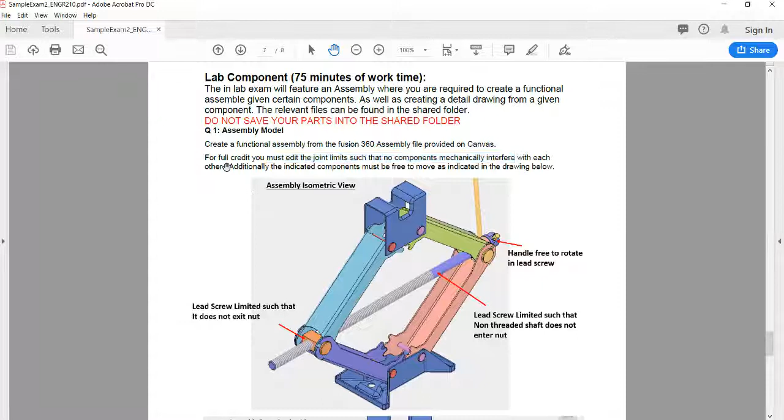For this test, you will not be allowed to use contact sets, so you'll have to do it using joint limits. Okay, and also you need to capture the motion as indicated in the diagram below.

So I'll probably give you multiple views. Here's an isometric view, and it's showing you that this lead screw, as this thing screws out, it shouldn't exit this nut because it would fall apart. Now, yes, it would be free to, but we want to limit that motion.

And also, if you're screwing this screw forward, this threaded part right here, it shouldn't be able to go through this non-threaded part of the lead screw rod. So that's something that we need to limit with a joint. This needs to be free to rotate, this little arm right here.

And then what you're seeing here is a section view, and you're seeing that the lead screw is free to rotate and translate through the nut, and it translates — I have to check the units on this — I guess this is 100 thousandths of an inch per degree, per 360 degree revolution.

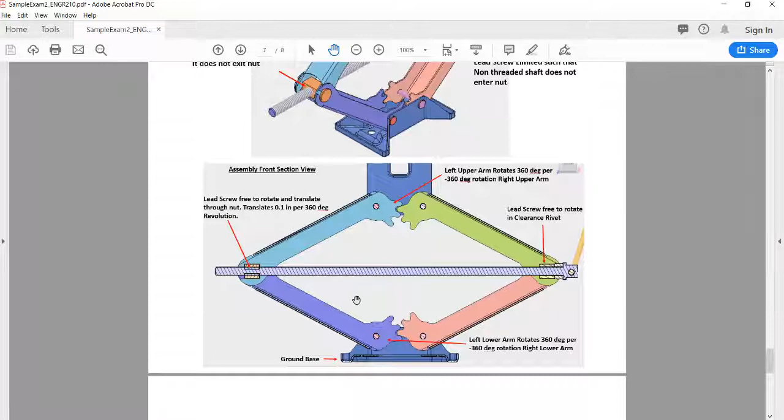It's also saying that up top and down low, these swing arms right here will rotate with each other, but for every 360 degrees this arm rotates, this one must rotate negative 360 degrees. And we want to make sure that these little geared teeth are not going to interfere with each other.

And then finally, make sure you know which component should be grounded. In this case, that is the base. Let's go ahead and take a look at the model and see if we can put this thing together.

So step one for us is going to make sure that this base component here is grounded. You can see this little pin that it is grounded. But just in case it wasn't, if you were to right click on the component, there's the ground option, and what that does is that I can't move it around.

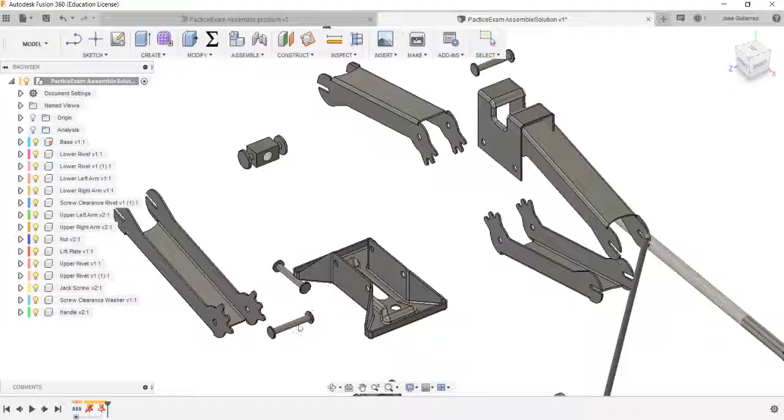If I click it, I can't move it around. All the other pieces right now, if you click them, you can move them around. One thing that may make it easier is if you go into inspect, or just press Shift N, you can make these color coded, and that makes it a little bit easier.

So in brainstorming this, one thing might be that these pins could be free to rotate here, but you don't really need to add any extra degrees of freedom if they're not needed. So it doesn't really help or hurt if this pin were to spin in this hole. So I'm just going to make it rigid to keep this more simple.

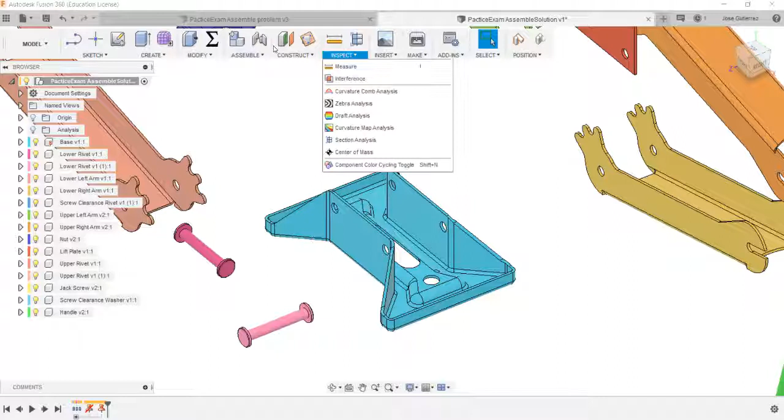So if you go to Assembly and click on the Joint tool, or just press J. From now on, I'll be pressing J, and I'll continue.

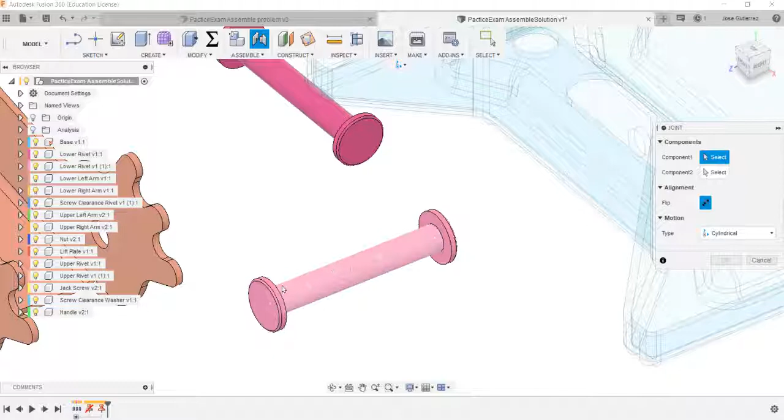What you want to be able to do is — a lot of times there's a ton of joint options — I want to be on this axle of this pin, and if you hold down the control button, that won't let me select. See here, I can't select any of the joints, whereas if I don't hold it down, it's kind of difficult. So hold control, and then let's go ahead and put that on this face.

I'm holding control again, and then I get a coincident. Now I have a cylindrical joint type. I'm going to go ahead and change that to rigid for now. And then I'm going to use the joint tool again, J.

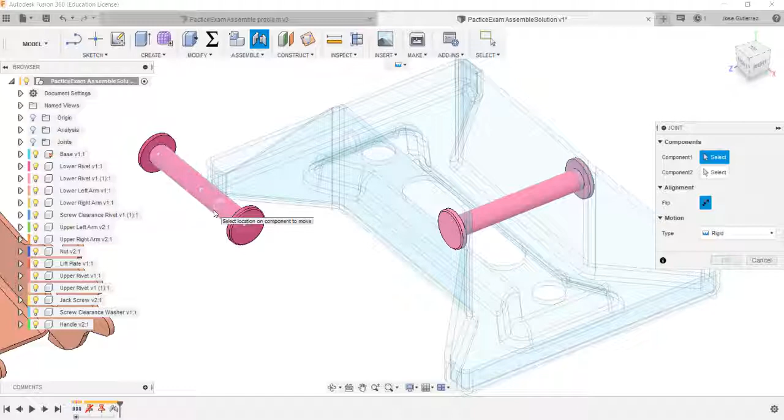And so I got something that looks like that. What do you need to do? If the joint, now you see this face is meeting nice and flush like I had indicated, it's just in the wrong direction. All you need to do is flip it.

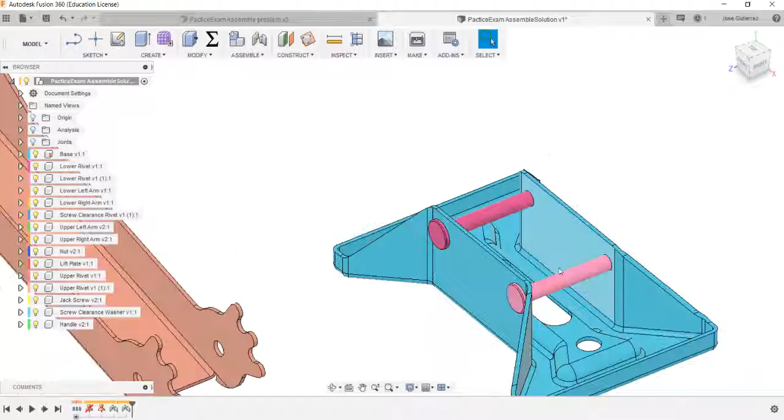Okay, let's go ahead and add the pins up top. So I'm going to go J, holding that control button. Make sure you're getting in the center of this hole.

So now let's add joints so that the lower arms are in place. So I'll press J, click J, and then Control, select that center point of that eye.

That's going to go on this shaft, but I don't want to join it to the shaft because I don't have a real good spot to pick it up. So I might just put it next to this face, flush on that face. Maybe you're thinking, hey, that's a good spot to put it in.

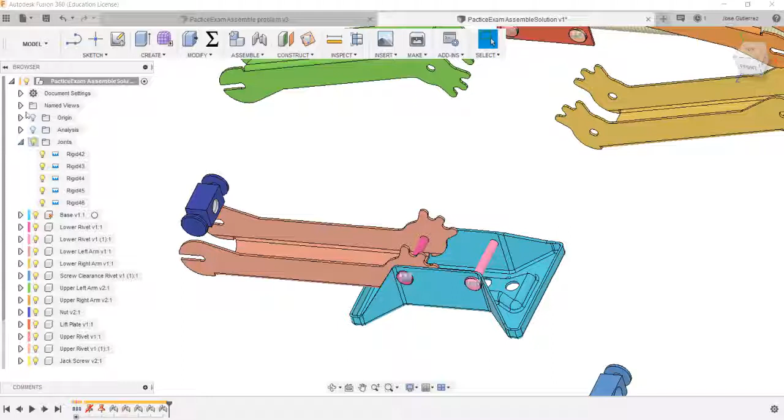But now I click OK, and I realize I can't move this joint. Why not? Well, because it's rigid, and you may even want to turn on your joints. If you click the light bulb next to the joints, you can turn it on.

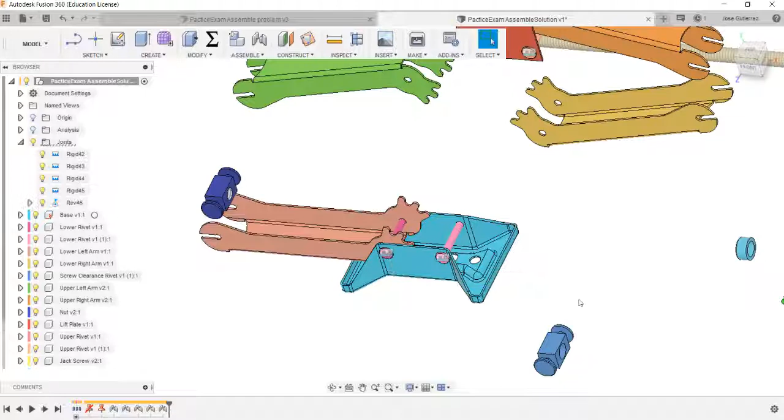And so that last joint, I need to edit it. Right click and edit it, change its type to be, let's just do a revolute joint. For the most part, it's nice to limit the degrees of freedom, and we really just want to capture that this joint can spin. And so I'm going to go J,

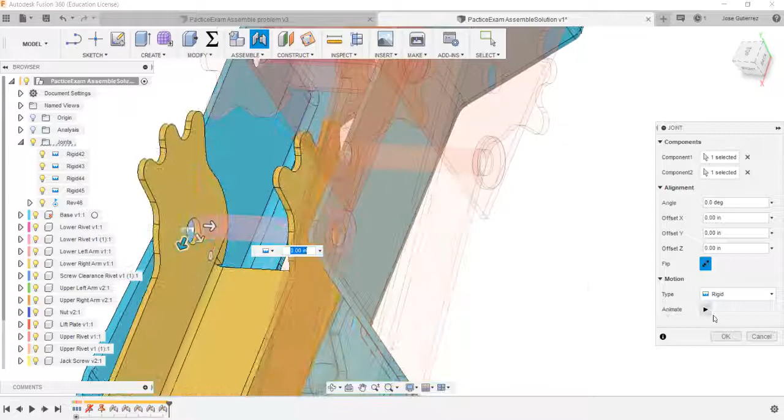Get this joint, do the same thing. Make sure you change that to revolute.

Okay, now let's make the joints on the top, so the upper arms. So I'm going to go J, there we go. Starting to look good.

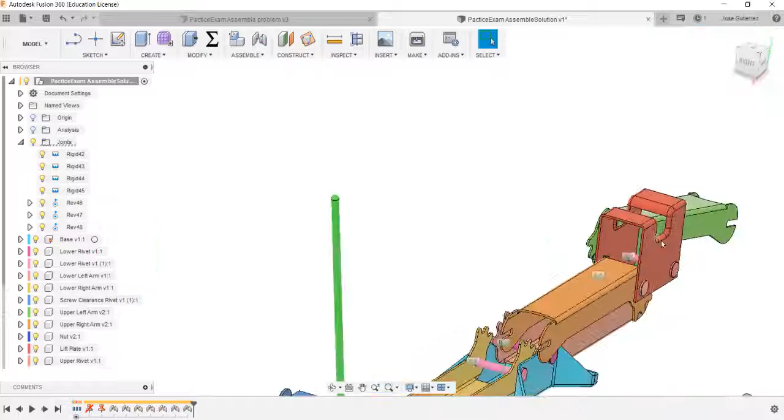I see this guy right here. I'm going to add it to that face right here. Okay, it's starting to come together.

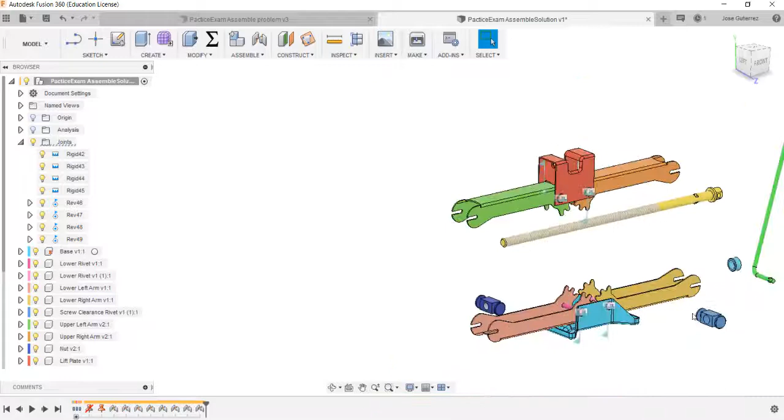Now, what we'll see is there's a threaded nut, and then there's one that's smooth that just lets things spin in it. So let's take a look back at the exam. Okay, so it looks like the threaded nut is on the left side.

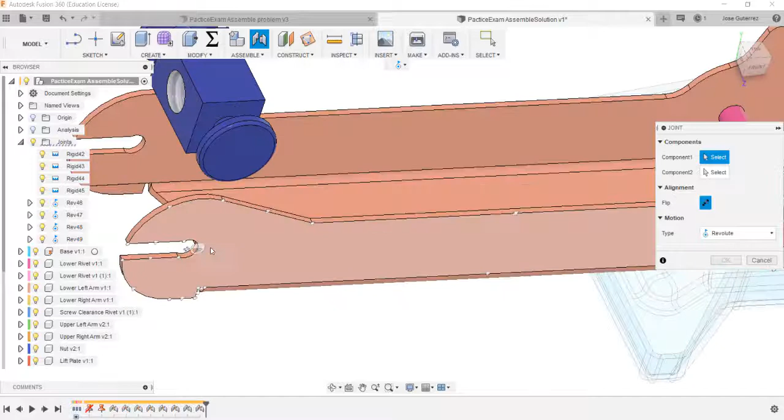Okay, so going back, let's add this joint on this face here. Pressing Control will let us pick up that spot. Let's add it right here.

I'm going to go ahead and add this guy's joint right here. So click J, Control on that face. I'm going to add it right here.

Okay, and I'm going to move stuff around because it's going to be easier to see. So you can capture position and then press J. And then I'm going to try to add it to this face right in the middle.

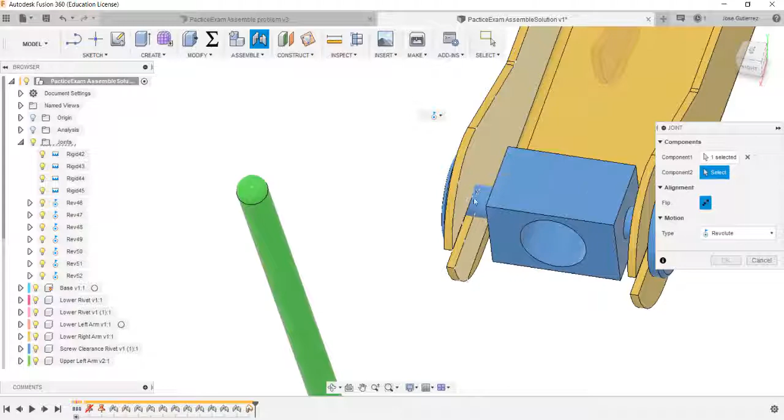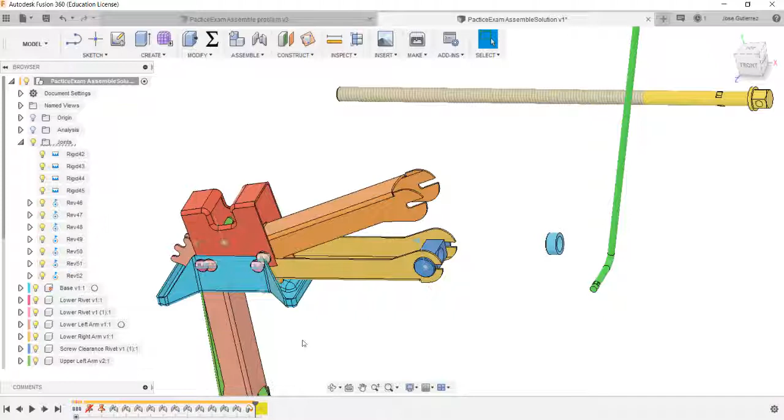Okay, and I get a warning. Uh-oh, it's not going to let me do it. What is going on? This might happen to you in the middle of your exam, and you're sitting there, and oh no, all the joints just went red. What happened? Let me roll the history back so not everything is red. That's kind of scary. But what is going on here?

Okay, and what's going on here is you're going along thinking, oh, we're doing everything right. Let me actually show you a view from the left. And what you'll see is that when I added all those revolute joints to these faces here, there's a little bit of gap.

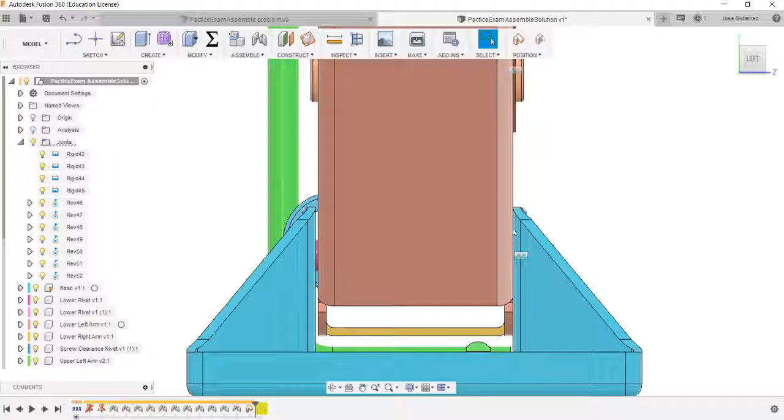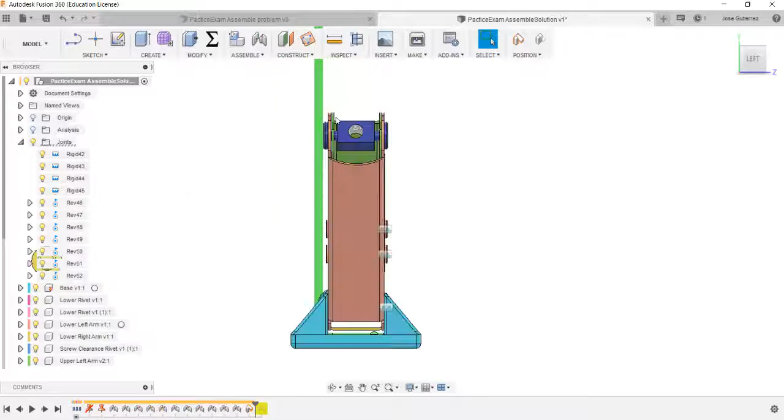That's because there should be some clearance here. And so since I was picking up on this left face, or right face here, the left face of the right side, what I did was create a gap over here. And that is, it's kind of okay, but there's a problem.

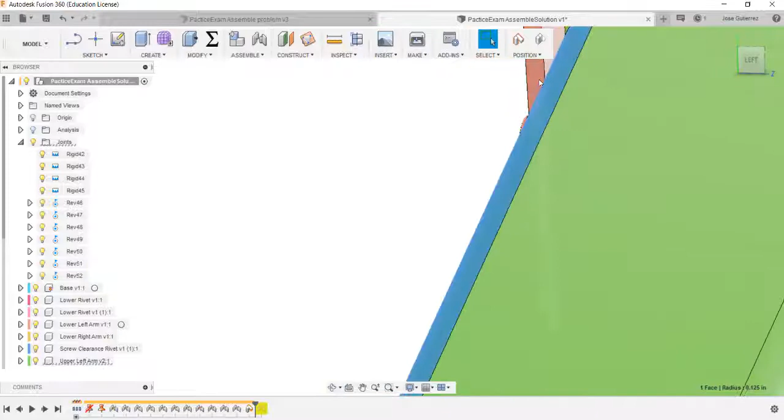Let me show you what this problem is. As I was going through and adding these joints, what I did was I joined this onto the right side face of this left edge of the top bracket. Why is that a problem?

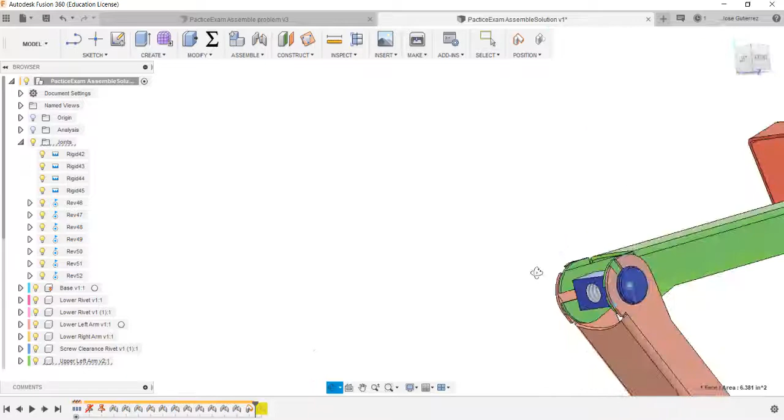Well, now what you can see is if everything is riding on the high side here, but this thing over here is not allowing it, what I've basically done is that there is no possible way this thing - and if you kind of come down, let's take a look at the top, like where it's just sitting right now. It's actually got a conflict.

So it can't, because it's been pushed to the side, it can't join where we wanted it to do. So the quick and dirty way to do this is to change it up, because we don't want them all to be cylindrical joints. If we made these all cylindrical joints, we wouldn't have any control over where these pieces are going.

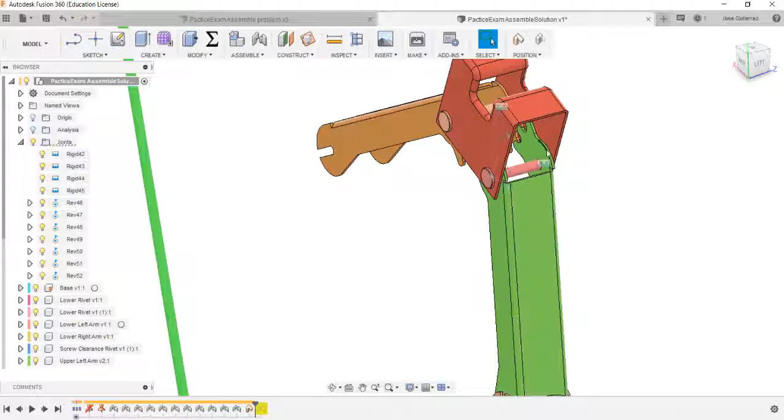But we could add a degree of freedom to just one of these joints, and that will let it accommodate this translation. So if I go back to this joint, which is our problem child, this Rev 49, and you edit that joint, and if you go ahead and make that one a cylindrical joint, okay, let's see what happens when we try to roll back our history.

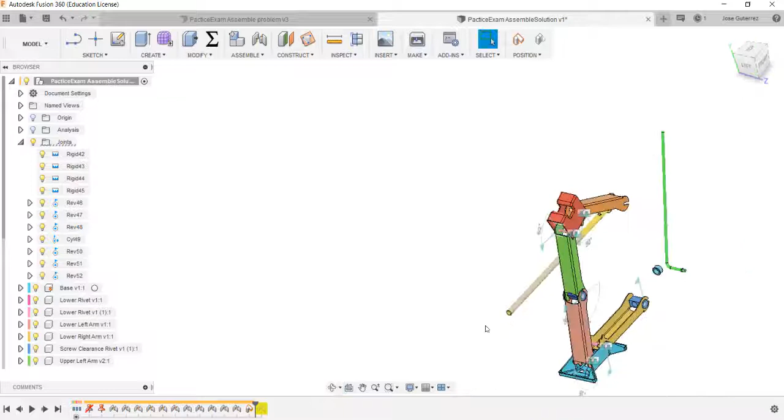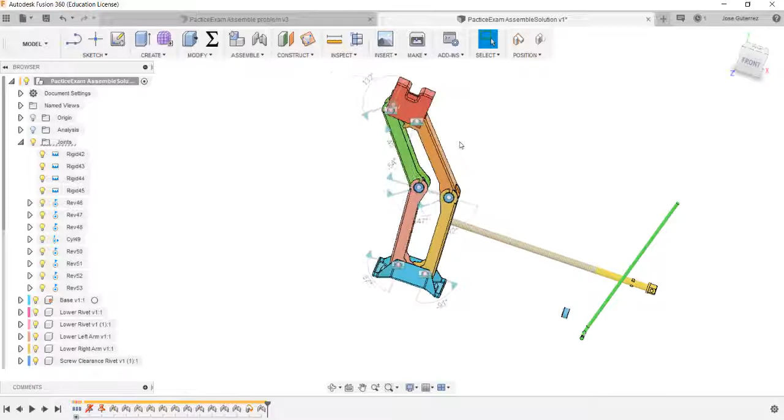It now lets it join. Okay, so that's good. Just adding that one degree of freedom is going to let us get this joint that we wanted. There's a better way, and I'll go over that at the end of this video, but if you're on the exam and just want to get it done, adding that one degree of freedom so we didn't have the joint conflict is the quickest way.

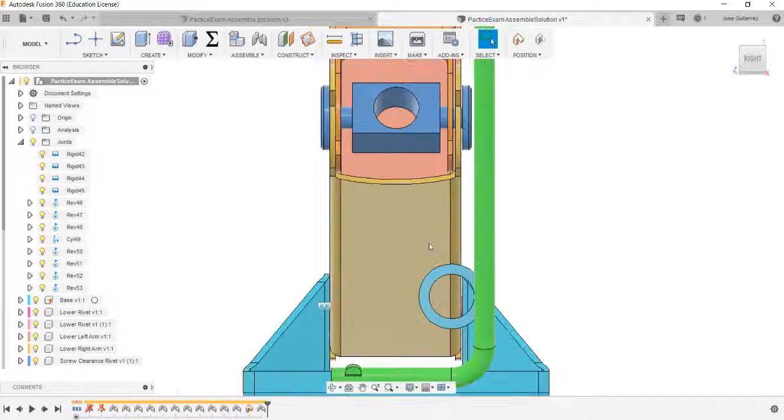The better way might be to make sure that all of these joints have center to center alignment, because I've got this funky gap here. In order to do that, you're going to have to build in joint origins, and make center point joint origins. Okay, so let's continue along.

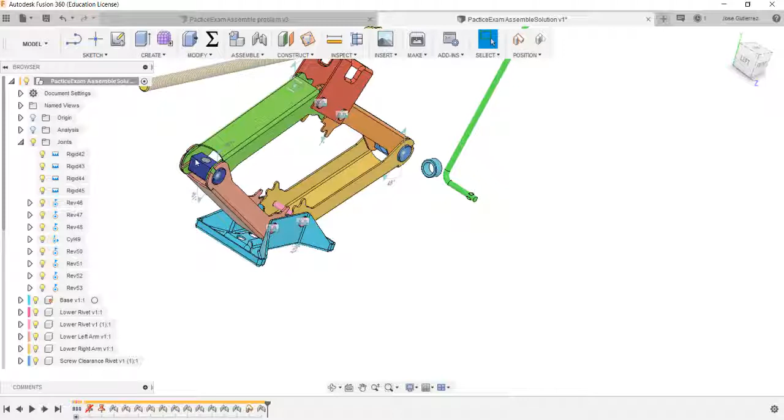And what we might want to do is make a cylindrical joint because it's got to slide and translate through this threaded part. So let's go joint, I'll capture position, and I'm going to go right here to right there, and let's make that a cylindrical joint.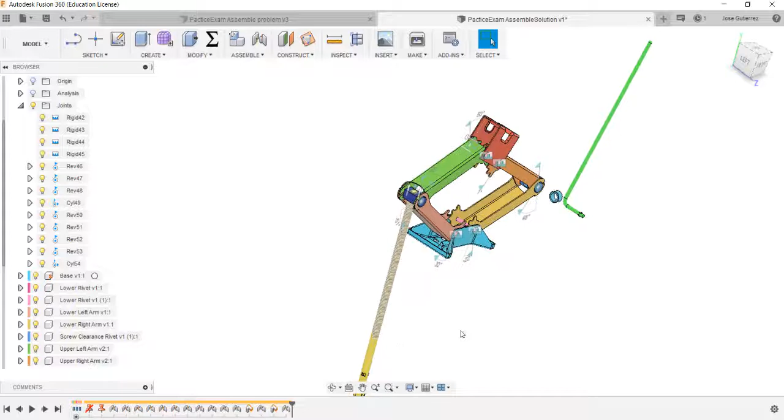And then let's make another joint. Actually, before I do that, let's join this little bushing. Where does it go? Let's take a look. It looks like that bushing is right here. Okay, and we can see it in the other picture. It's right there. So let's go join here.

And I could give this some degrees of freedom, but it's honestly not necessary. So I'm just going to go ahead and make this a rigid joint and flip the direction.

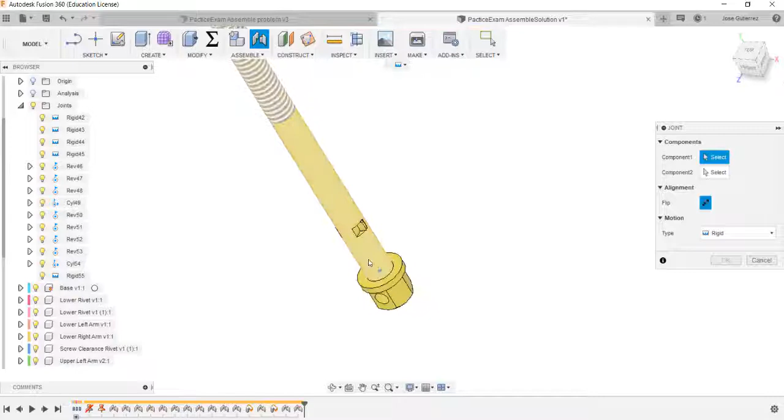Okay, and then I'll make one more joint here. I'm going to just let this, since it's not supposed to translate, like the bushing wouldn't let it translate through here. And then there's these little wings right here that's not going to let it move through this holder. So let's just make this a cylindrical or a rotational joint. So let's go ahead and make it a revolute joint. Flip the direction and okay.

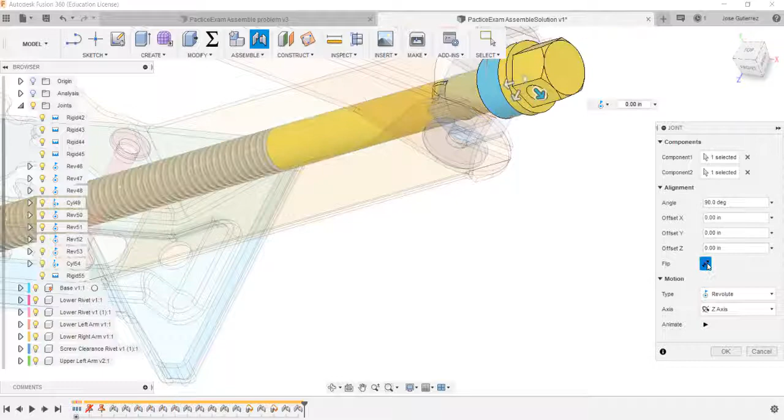And by adding that one degree of freedom of the revolute joint, it's letting it accommodate it. If you hadn't done that, it would actually have a conflict right now. But now we don't have that conflict.

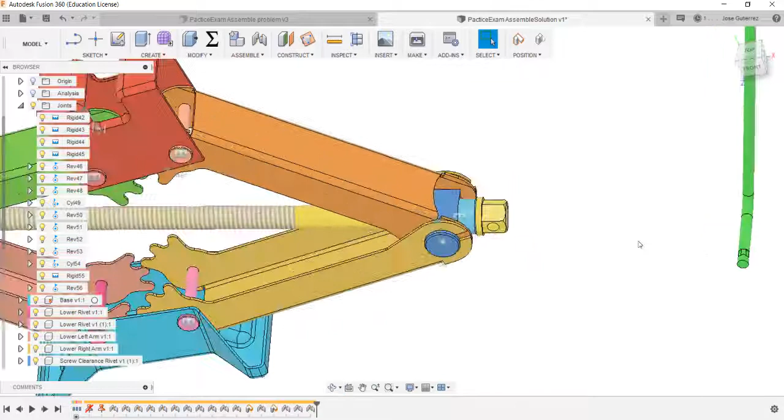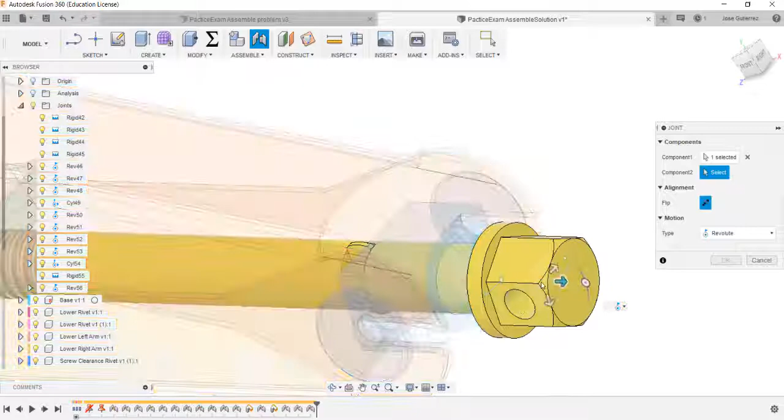And then I'm going to go ahead and let's join in this guy right here. So joint, continue this, and it's supposed to be, let's take a look. It's supposed to be free to rotate in here. So we want this little crank arm free to rotate. So press Control, and then I can easily click that joint origin in the middle, and let's just let it be a revolute joint.

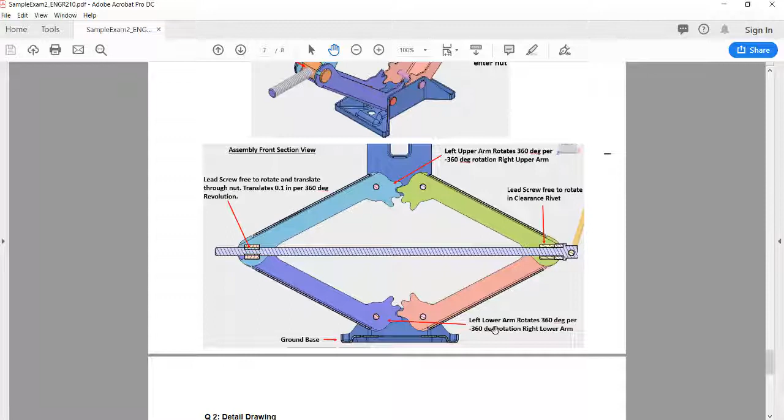Okay, so I'm not done yet though, because I come back to my problem statement, and now I need to edit the joint limits and make joint relationships so that it captures all these. So I need this joint relation, this joint relationship, and this one. I'm going to go ahead and add these rotational joint relationships.

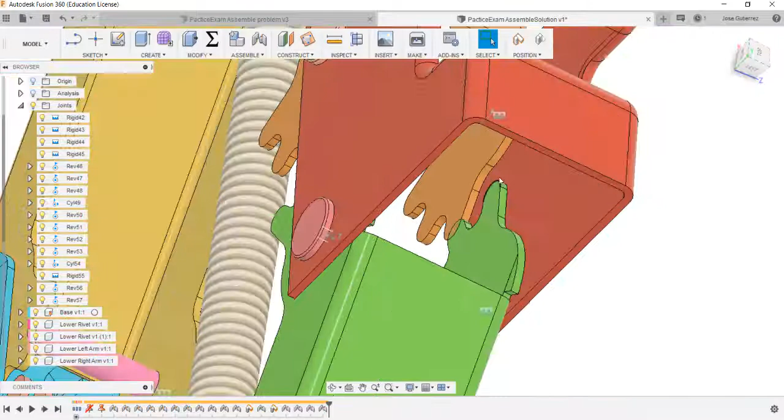One thing will be is that right now, I can't just put it in place. So if you just go ahead and add the joint relationship in place, you may get collisions, so like you might have these gear teeth interacting with each other. That's not good. One thing that we should know is that at the limits, so either 0 or 90 degrees, these arms would have to come together.

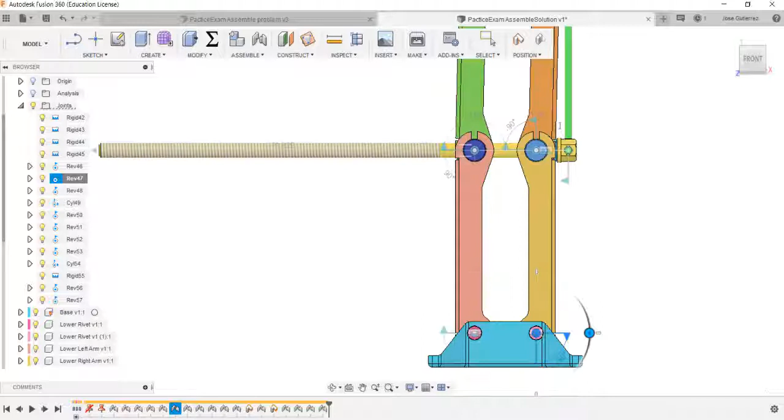So what you can do is take your joint, drive the joint and put it at a limit. So I'm going to go 90 degrees here and say, okay, I'm going to take this guy, drive this joint and say 90 degrees. Oh, and I better do negative 90. Okay, go ahead and capture the position.

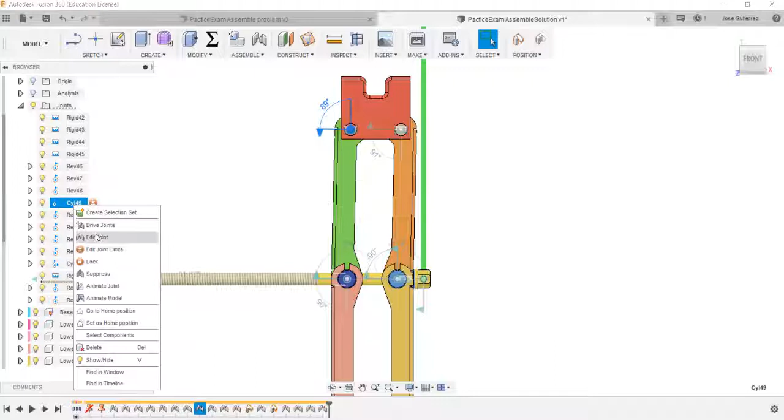And actually, you know what, on top, let's go with these joints up here. I'm going to go ahead and drive that joint to be 90. So this cylindrical, say drive joint, make the angle 90. And this one is 90 too. So now I'm going to capture, oh, Control Z. Let's go ahead and capture that position.

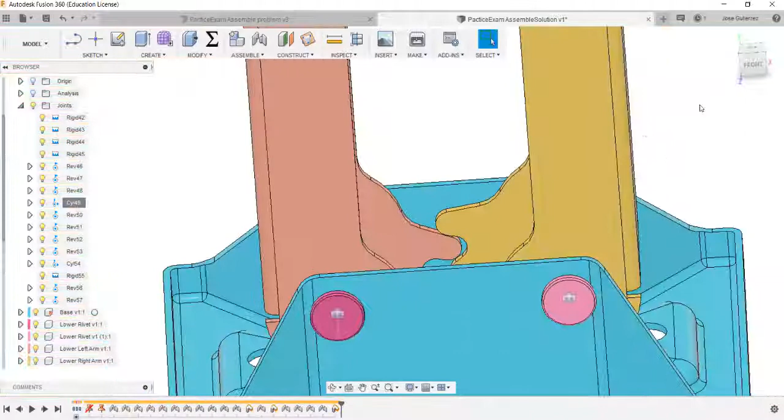So why is this important? Well, if you come in and look, what I've got is there's no contact right now. And it might even be a good idea, and I always like doing this, is to make a section view. So if you make a section view, let's go ahead and show the origin. And I'm actually going to have to move it halfway through this face.

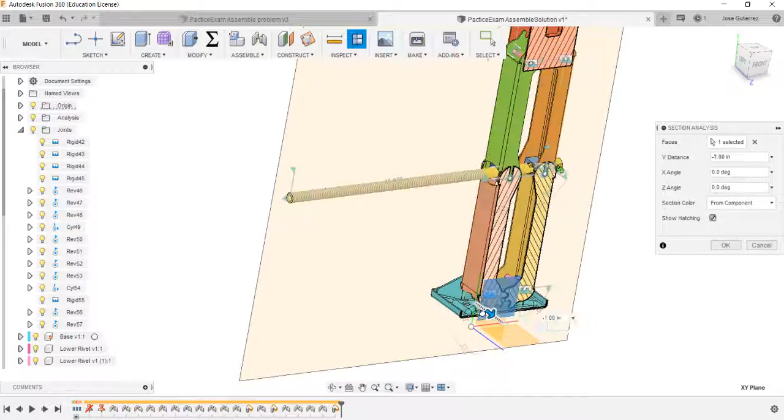Why section views are nice is that now it's letting me see what's going on in the middle. So when it is at 90 degrees, I don't have any interference, and these gear teeth here are now going to interact properly.

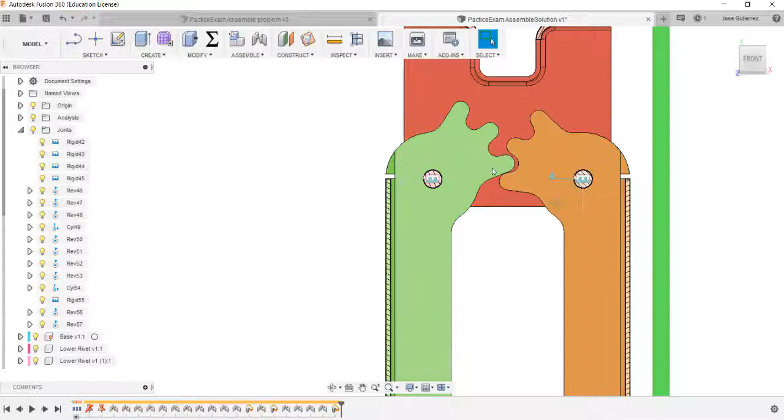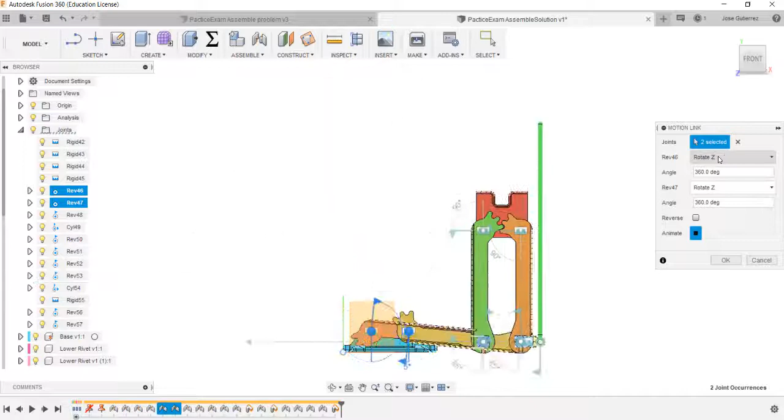So now that it's in the correct position, we can go and set our joint relationships. I'm going to go underneath Assemble, go to Motion Link, select the joints - this guy and this guy. And what we need is for every rotation, one rotates, the other should rotate the opposite direction. So you can type in negative 360 or you can reverse the direction. So that's looking correct.

So now we've got that and you can play with it. So now it's actually a good idea in the section view to take a look at it, and you'll see I don't have any mechanical interference. So that's really good.

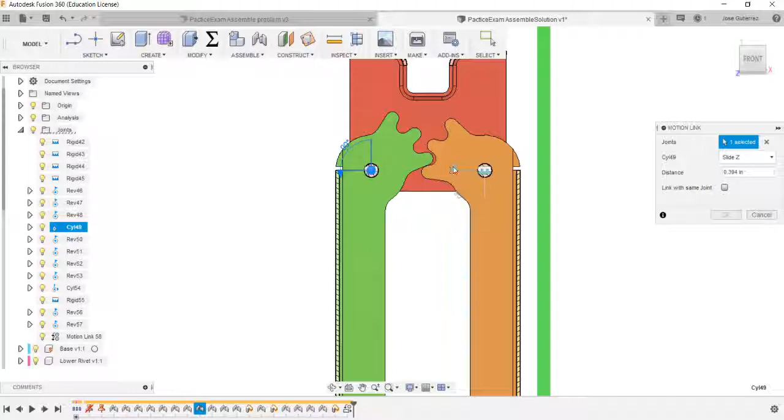I'm going to revert position because I want to be in the right spot for the upper joints, and go ahead and click Assemble and take a motion link between this joint and this joint. And since one of them was cylindrical, what we need to make sure it's not a slide, it's both rotate. So rotate to rotate.

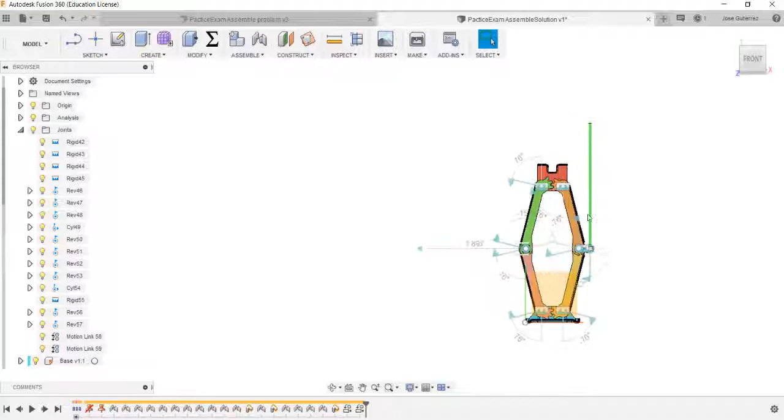And that's actually looking - actually let me reverse this. Nope, it is correct as is. So now what you can see is this thing is standing up and going down.

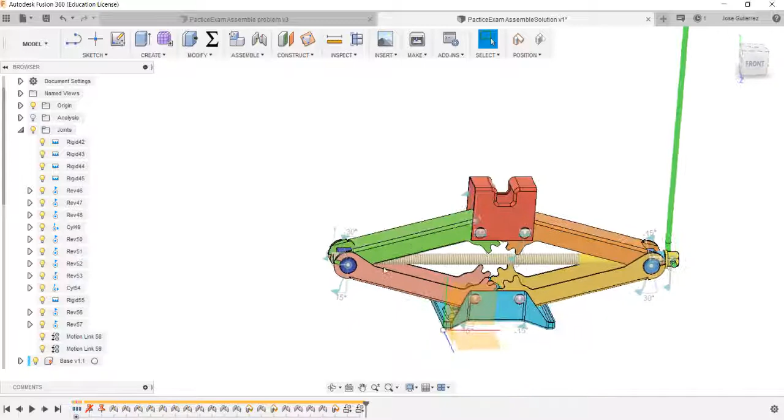Now what we need to do then is limit the joint motion so it can't go through the base plate. That's a mechanical interference that we should be able to limit. But before we even do that, I'm going to turn off my analysis, and let's go ahead and add the lead screw mechanical joint relationship.

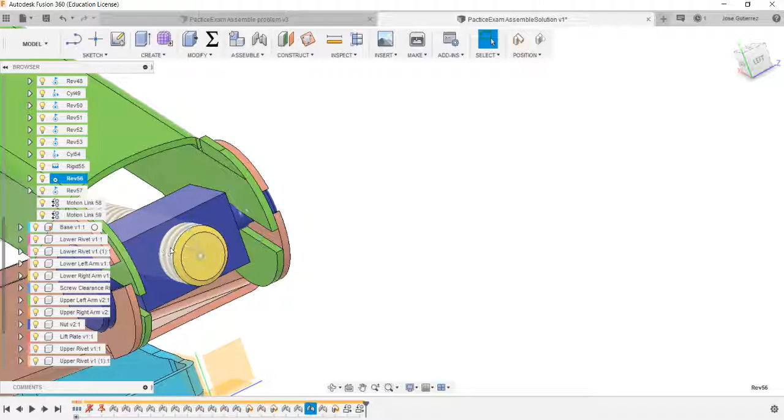So a good choice might be the revolute joint over here, because every time this spins, since the nut over here is threaded, we want the thread to be moving. What that will do is move our jack stand up and down. That's what this is - it's a jack stand you might find in the back of your car to repair your flat tire. Okay, so let's go ahead and do that.

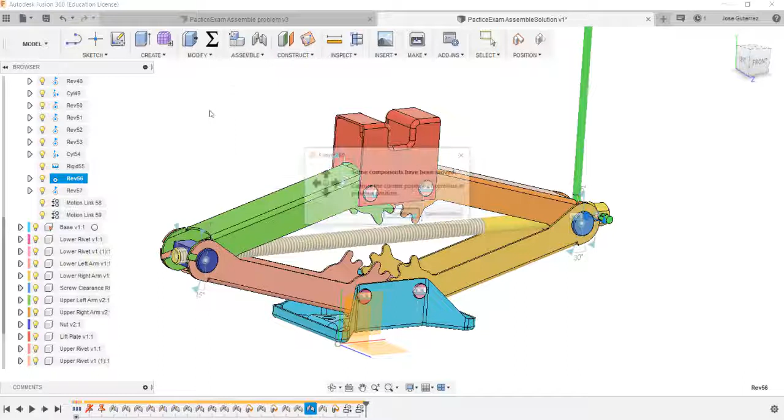So let's go to assembly, let's make a motion link, and I'll just continue. So it's going to be up here. And the joint I want to pick out, I'm looking at it right now - actually, I've already selected it. And then it's the cylindrical joint over here, so I'm going to click right there because that's that cylindrical joint.

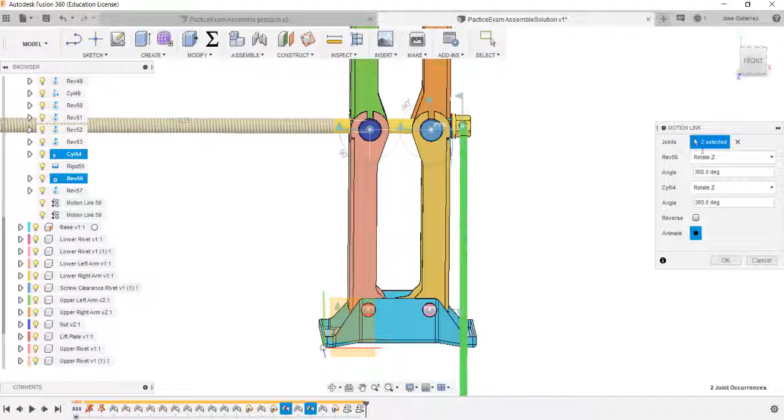So what we need to change this time is now for every revolution of our revolute joint, we need to not rotate, we need to slide. And we were given that it was 100 thousandths of an inch.

Okay, let's go ahead, and it won't animate correctly, but let's just take a look at that. One thing we can do is take this joint, the revolute joint, and drive it. So if I screw right-handedly, it should bring it together. So that's actually looking correct.

Now what's not correct is it's screwing on a non-threaded part, but you'll see here - to lower it, I'll screw the righty-tighty, lefty-loosey. So this is looking good.

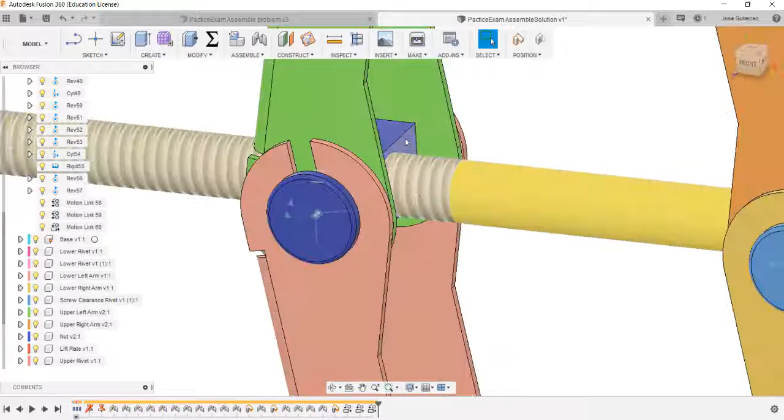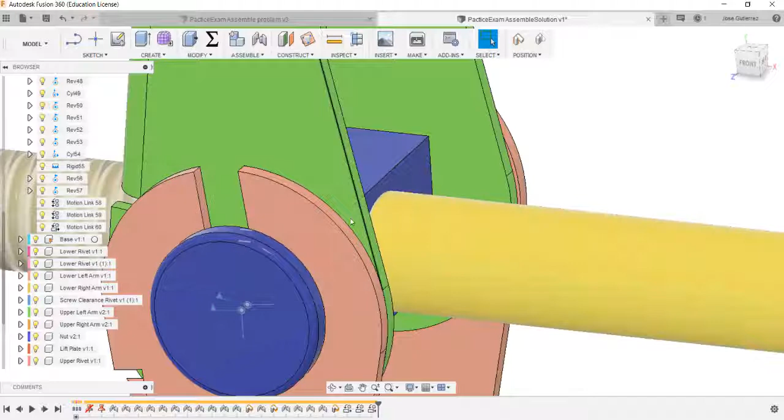And now what I'm going to do is, since I've captured that motion, I'm going to actually move this piece right here freely, and you can just eyeball this - you don't have to actually press the move. So it's like, okay, right about there my threads end. And what would happen is the threads on here would bite into this, so it wouldn't allow it, it would get stuck. So right here is the limit, and let's just make sure there's no other mechanical joint interferences - doesn't look like it.

I'm going to turn off my origin. Okay, so what you can go do is if you say drive joint limits, you'll quickly see that distance right there is 10.366 inches. So that's one of my joint limits I need to set up.

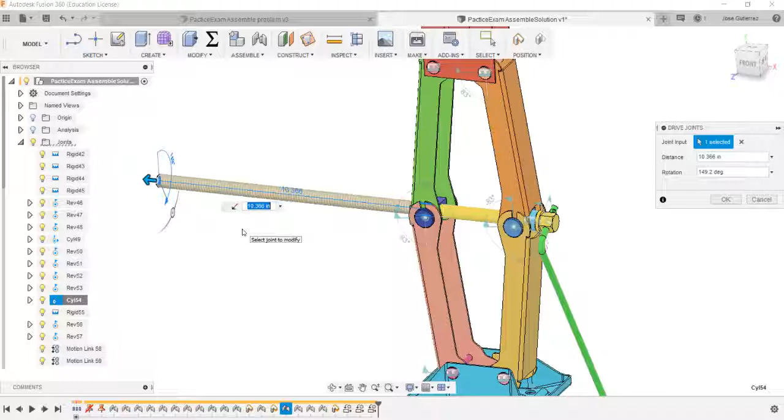But I need to go the other way, so what I want to do is let's bring this thing down.

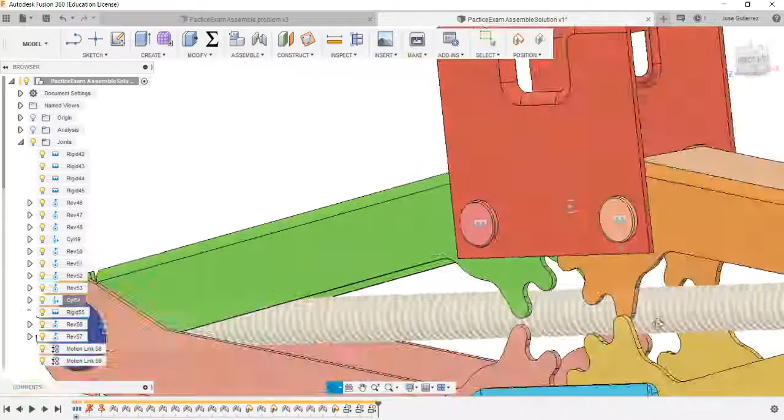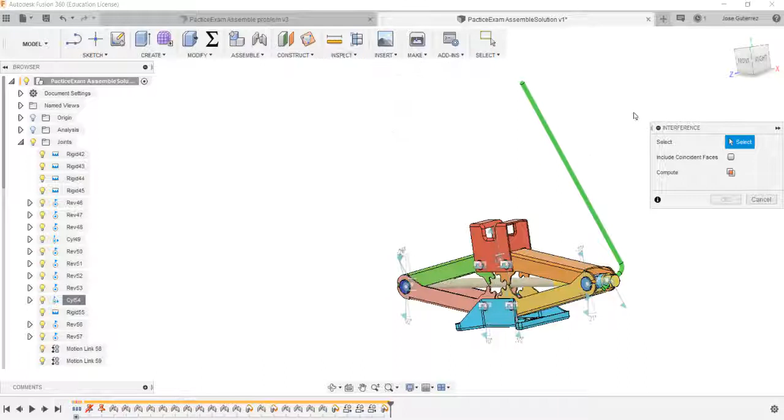I want to make sure that I'm not going to have any other mechanical interferences. Actually right here, I'm getting a little bit of collision. Now, what you can do on your exam is go to inspect, and then say compute.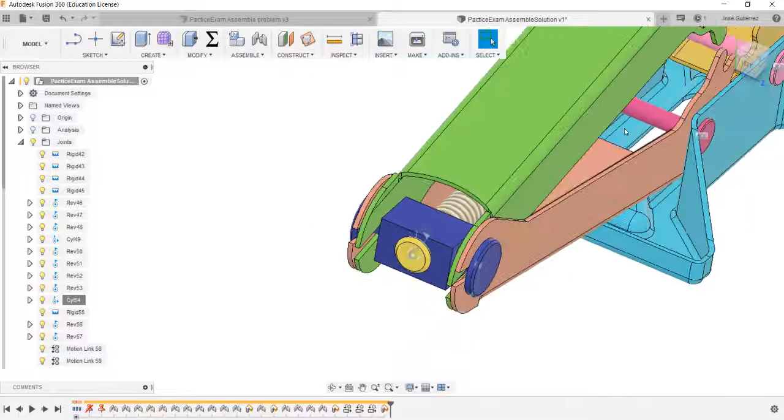So under inspection, you do interferences, select everything, and go compute. I do have an interference, but this one is actually okay. It's right here, and that's because of the way these threads were modeled, there is always going to be an interference right here.

But that one's okay. What we didn't want to see is an interference between these components. So right here, I'm actually going to limit this a little bit. I'm going to move it up.

It's not like I'm looking for an exact number here. I'm just seeing that you do a pretty good job of capturing the functionality. So about right there would be the limit. If it comes down any more, since these are free to move back and forth, that should limit this.

So let's go back to that cylindrical joint, drive it, and it's 31 thousandths of an inch, so 0.031 inches. Okay, and so now I have my joint limits.

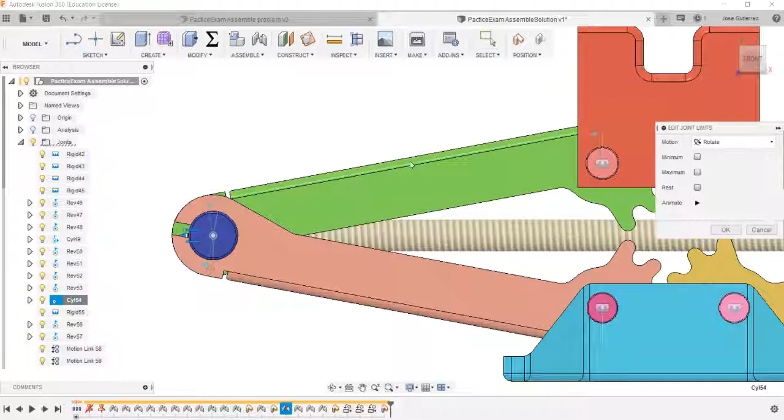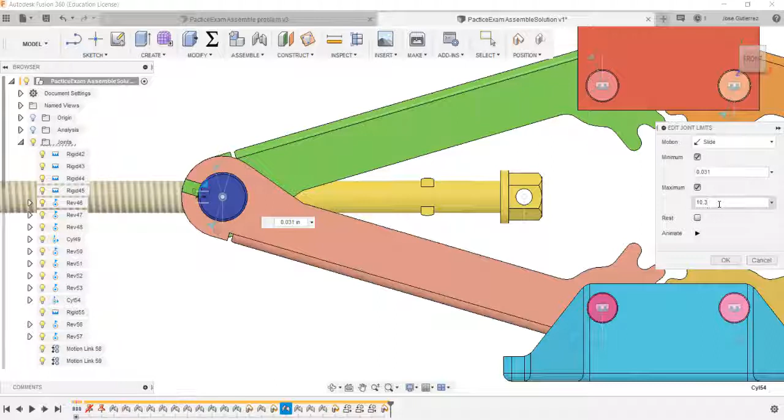So you can go to that cylindrical joint and say edit joint limits, and let's give it a minimum. We're editing the sliding, so the minimum value for sliding is 0.031, we just said, and then the maximum was 10.3, and you know what, instead of that 366, let's just do 37.

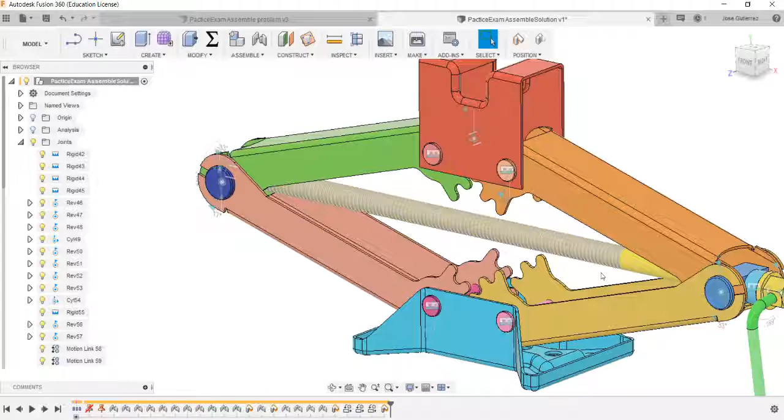So what you'll see now is that I'm not allowed to move it any further than that. And let's go ahead. One thing you might find is that even when all these components are grounded and in place, it may be hard. Like I'm trying to move this thing around, and you're like, oh no, is my motion correct?

What you can do if you want to check is drive this joint right here, and it should move. So you could drive this joint, and let's see if it's capturing it, and it is. So by turning this righty-tighty, I'm lifting my jack stand,

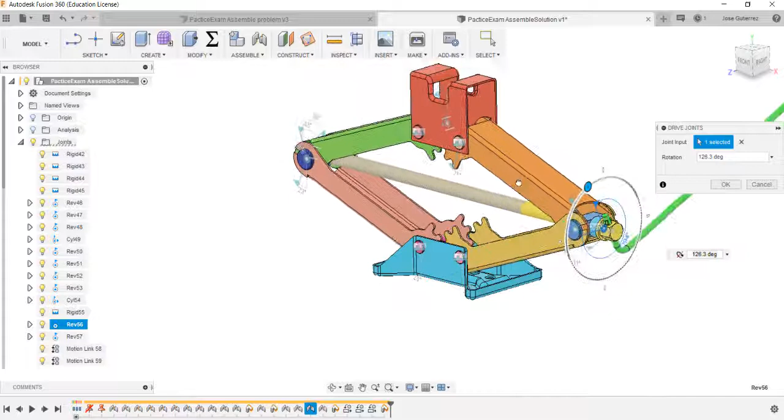and by turning it counterclockwise, I'm able to bring it down. And what you'll see is that it won't actually let me turn it anymore. So my joint limit has kicked in right here and it won't let me turn it anymore. And let's drive it the other way.

It's going to take a while. It might be quicker to try to just pull it up. No, it's...

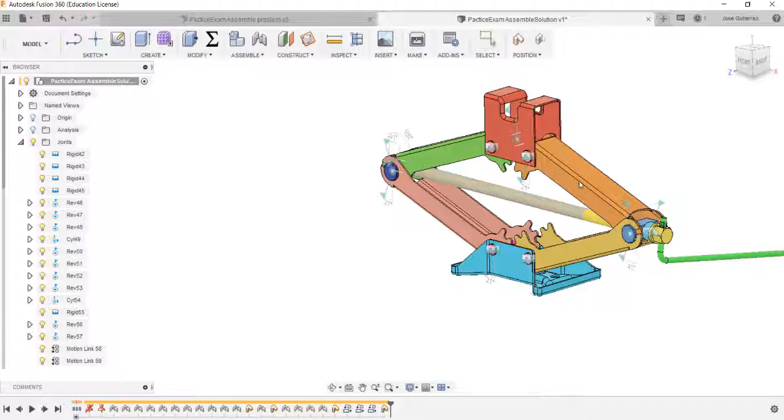So the other thing you can do with this cylindrical joint, you can drive this joint. We could move it this way, and what you'll see, this thing was spinning really fast, but now it's not going to let me drive it any further.

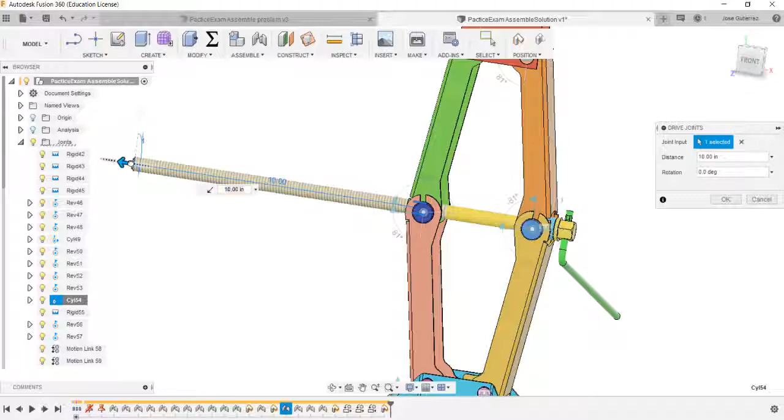Okay, so that's looking pretty good. Let's see here. Okay, so we've done it. So now we've fully captured the functionality, and this would be a 100%.

So I will go over now the alternate way of how you could put this together without making one of these joints a cylindrical joint.

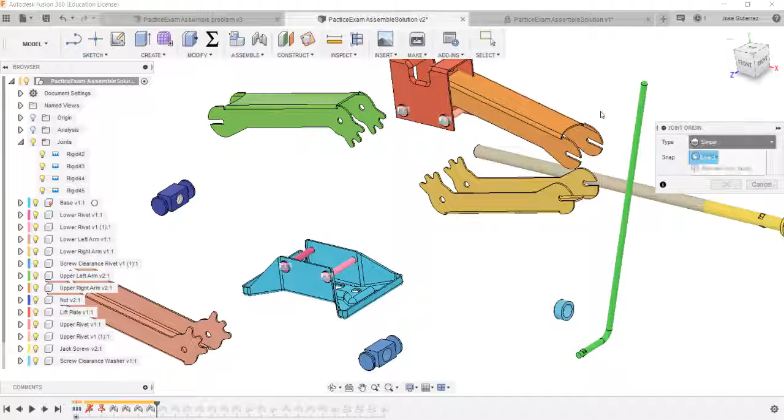Another way you could make sure that you were able to get these things to join together without having any conflict would be to make artificial joint origins. So if you were to make a joint origin as a center to center between two faces, you could go into a joint origin into these components that don't have joint origins and make center origins.

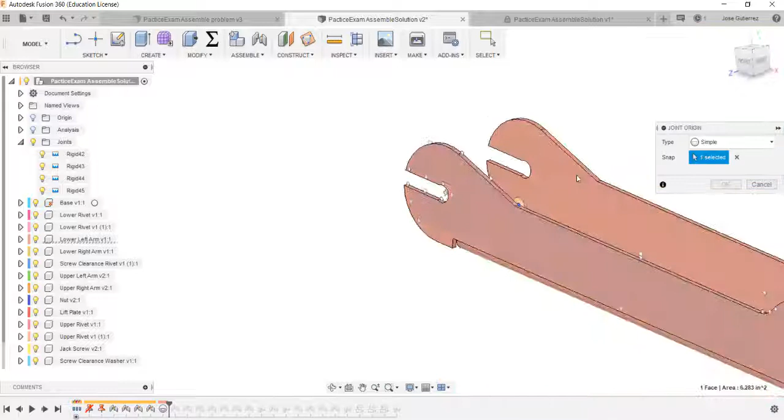So if you press Control, now I'm making a joint origin there, and I might make a joint origin here. So if you right click, repeat joint origin, between two faces.

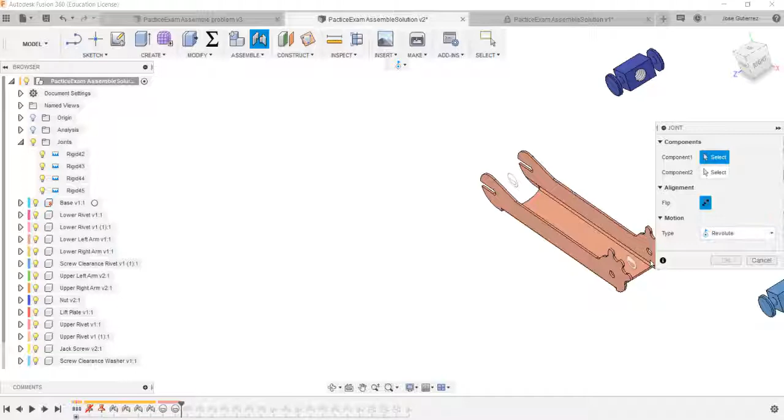And let's select our origin to be right on this center point. What we could do is when we go to joint, we could do our revolute, do that center point origin, and then snap to the center point in between the base. And then what we've done, if you look from the side, is now we've enforced that it's right smack dab in the center.

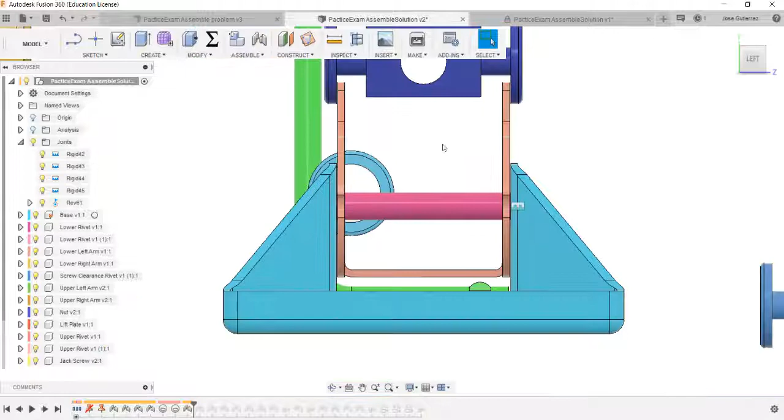And what that will do is if you do this with all of the joints when you put it together, then you should enforce that the alignment will be able to come together. Now, it might be easier for time's sake just to actually just add that extra degree of freedom by making one of those joints a cylindrical joint. But hopefully this helps.

Now that you have seen this video, I would say try to, if you weren't able to get the solution, try again and see if you can get the solution. And good luck.